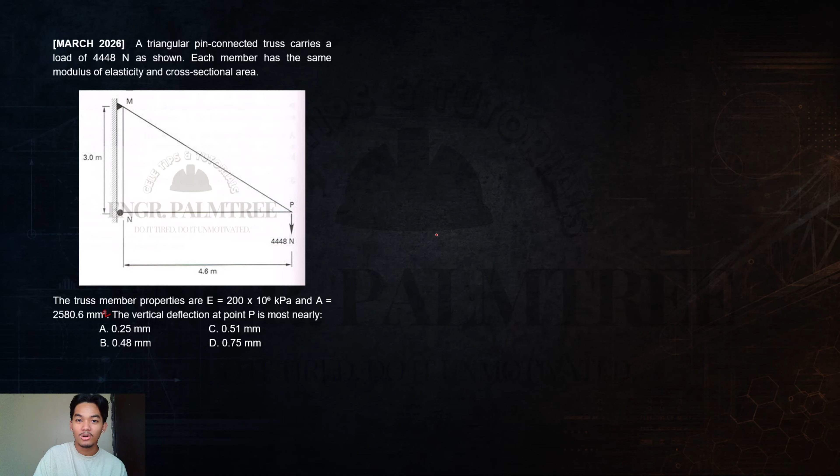So actually, nung lumabas to sa boards guys, merong binigay si Sir Dakay na virtual work equation. Dito sa actual reference niya, wala. Pero yung pag-solve nito is also virtual work, so it's the same lang.

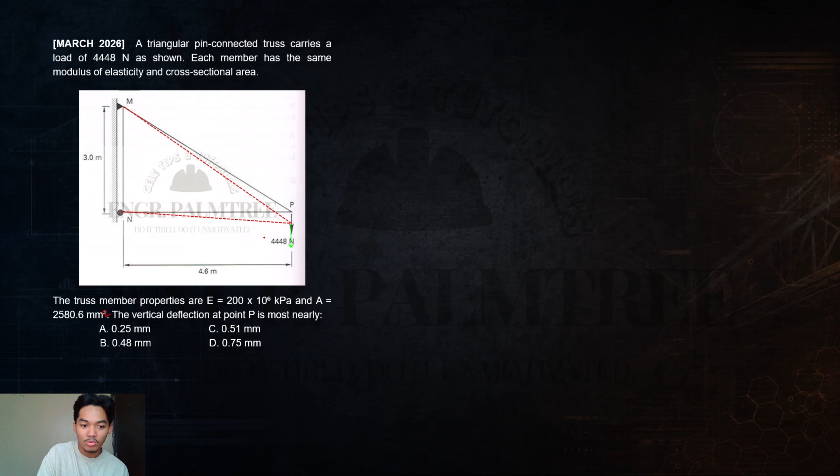So remember, pag meron tayong loading, magde-deflect yung body natin. Dito guys, as you can see, magde-deflect yan downwards. So gusto natin kunin is vertical deflection daw at point P. So ito yan guys, ito yung gusto natin kunin, vertical deflection dyan.

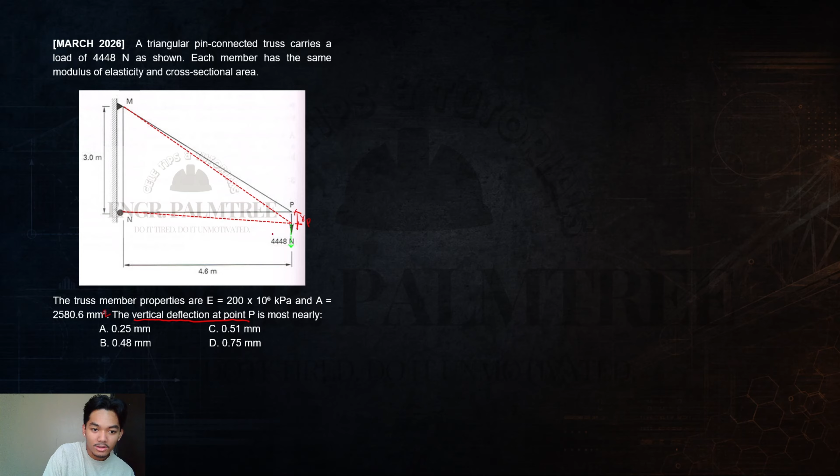So by using virtual work, remember, yung virtual work equation natin is basically just Sulae, summation of S-u-L-a-E. Yung S, yan yung real body natin. Yung U, yan yung virtual body natin.

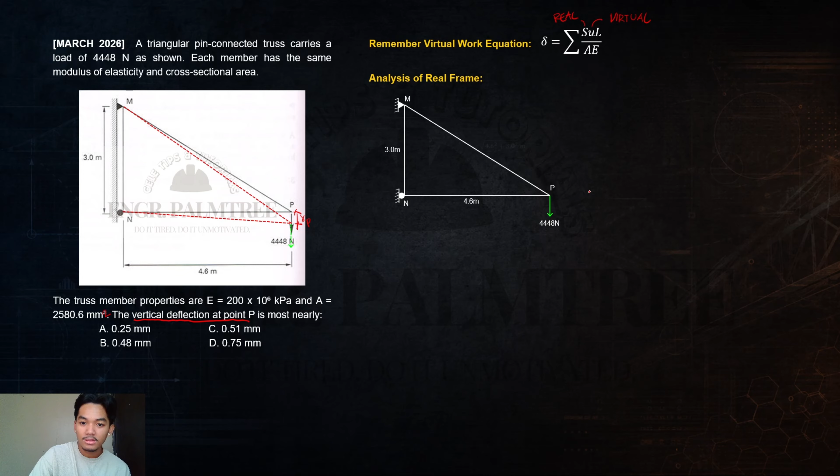So first, i-analyze muna natin yung real body natin. So ito yan guys. You can see, 3 meters daw dito, 4.6 meters dito, tapos meron tayong point load. At dahil 4.6 to, 3 to, at right triangle lang to, di ba? Right triangle lang yan, so pwede natin makuha itong length na to.

Using Pythagorean theorem, yung total length niyan is 4.6 squared plus 3 squared. Magagamit natin yan actually dahil dito, kailangan natin ng length. Kasi yung kukunin natin sa analysis ng real tsaka analysis ng virtual is yung force per member. Force per member. So kunin natin yung force ng MP, ng NP, tsaka yung MN.

Okay, so let's consider muna itong point P. Again guys, pag maka-encounter ka ng frame or ng truss, there's two methods to attack it: method of joints and method of sections. Pero dito guys, kahit pa mag-method of section ka dyan, or mag-method of joint ka dyan, it's the same free body diagram. So considering point P, ito yung force natin, ito yung external force natin. At yung dalawang forces natin na meron, na member is itong NP tsaka itong MP.

So gusto ko guys, malaman nyo paano ba mag-assume ng tama na direction ng force. As you can see guys, downward kasi itong P natin. Then yung dalawang forces na nakakonect sa kanya, yung isa purely horizontal, yung isa naman is slanted. So merong vertical tsaka horizontal component.

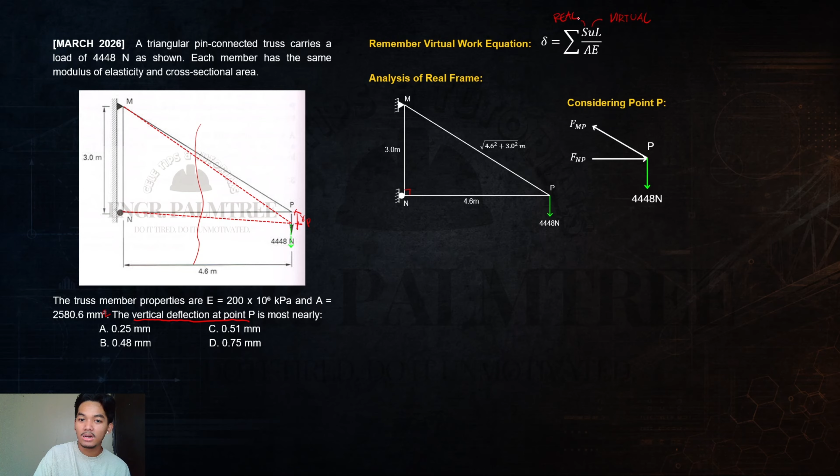So ganyan yung tamang pag-a-assume ng direction ng mga arrowheads natin, when it comes to forces. Pero actually guys, in terms of virtual work, mas madali talaga if gagawin nyo lang tension lahat yung members. Bakit? Kasi guys, yung compression, pag lagay natin dito sa working equation natin na Sulae, yung compression magiging negative.

So if i-tension natin lahat ng forces guys, pag may maling assumption tayo, magiging negative yan, meaning compression dapat yan. Kaya if i-store natin yan sa calculator, naka-negative na. Pero in this case guys, gusto kong malaman nyo paano mag-assume, kasi magagamit nyo yan pag makaka-encounter na kayo ng trusses na merong flexible cables.

Okay, so alam natin guys, since slanting to, meron yang angle. Para makuha lang yung angle, we just use tan. Tan, di ba, is TOA, SOH CAH TOA. So dito yung angle natin, then ito yung opposite. Kasi dito yung right angle, tsaka yung angle na of consideration natin, so ito yung adjacent. So 3 yung opposite, ito yung adjacent, 3 over 4.6. Then we try, pag-calculate natin is tan negative 1 times 3 over 4.6 lang. Then makukuha nating value is 33.11 degrees.

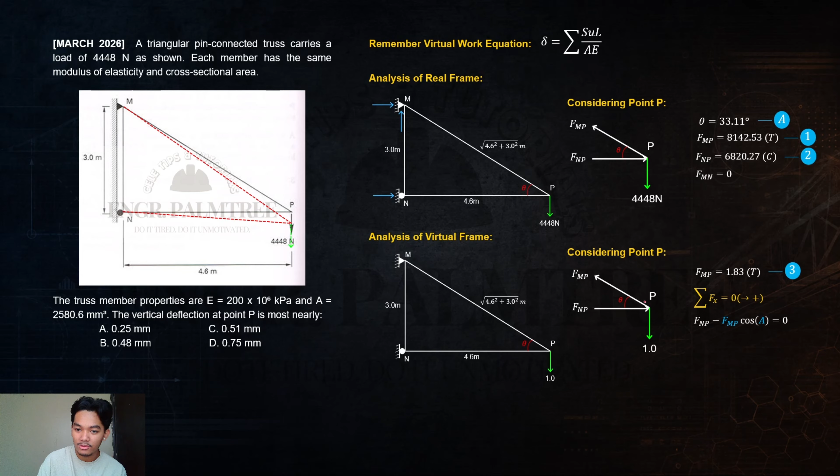And again, if we look at the reactions, it's the same geometry, guys. It's the same geometry. So we know, with the virtual frame, FMN is still 0. Okay?

So let's input all of this into the table for SUL/AE, guys. The member we're considering is only MP and NP, because MN we know is 0 for both frames, from real frame to virtual frame, it's 0. So the S values, guys, those are our real forces. FMP, here it is.

8142.53. Then our NP, again, that's compression, so 6820.27. And if we stored it, guys, when you input into the calculator, make it negative 2, negative 2, since 2 was stored.

And our U values, those are our virtual frame forces, 1.83 for MP, negative 1.53 for NP. Our length for MP, here it is, right? 4.6 squared plus 3.0 squared.

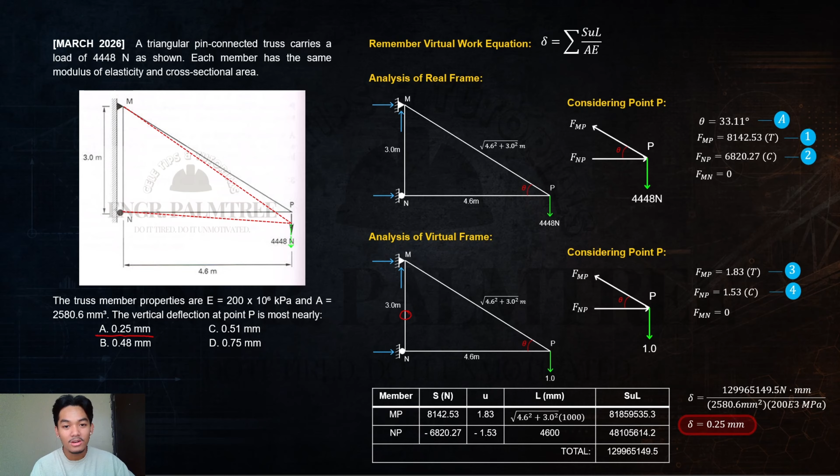But actually, guys, when this came out in the board exam, this wasn't my solution, because I have a solution when it comes to frames - single-loaded frame systems where the forces are concurrent at the point of deflection. So let's discuss it.

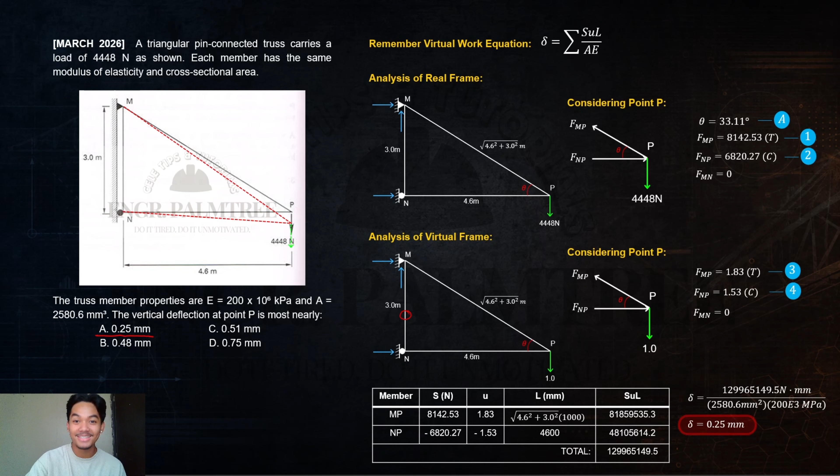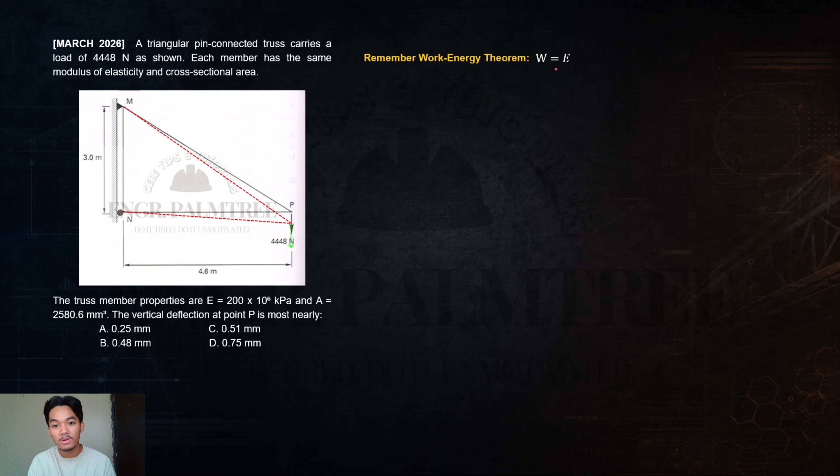Remember, guys, our work-energy theorem, which is work equals energy. Actually in physics, as written here, it's summation of work plus change in potential energy equals change in kinetic energy. But basically, this is the principle. And this W, that's work, right? This E is energy. So first, let's discuss the work done by external force.

So let's say, guys, we have a pole fixed at the top. We have a pole, we'll gradually apply a point load. Why gradually, guys? Actually, in statics of rigid bodies, although not stated in the problem, forces are applied gradually. It's not instant, like 4448 Newton instantly, because if it's instant, what happens is our frame, our beam, our truss, will vibrate.

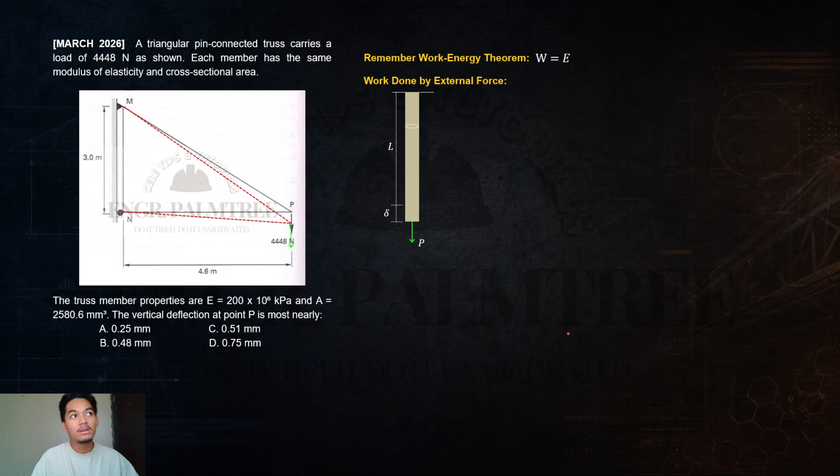Then it will have acceleration, so it becomes dynamics, not static equilibrium anymore. So by principle, in statics of rigid bodies, P is gradually applied. So if we gradually apply the P, there will be deflection. And actually, guys, we can calculate the work done by using the relationship of our force and deflection, and their relationship, guys, is simply linear.

This is the linear elasticity that statics or SMAT talks about. It's just linear, guys, the P and the deflection. Of course, if we increase the P, the deflection will also increase. And the work done, guys, is basically just the area of this triangle, just the area of that. That's our work done, guys. So we know, work is 1/2 times deflection times P, because this is a triangle, right? This is deflection, that is P. That's our work done, guys.

So next is the energy. Since we have work done, guys, it doesn't just disappear, it has to go somewhere, it has to go somewhere. Right, since it's gradually applied, gradually applied, so there's no acceleration. Basically, the velocity of the movement of the member, as it deflects, is constant, constant velocity, acceleration is 0. So since there's no acceleration, guys, since this is static equilibrium, there's also no kinetic energy, kinetic energy is 0. So where does this work go?

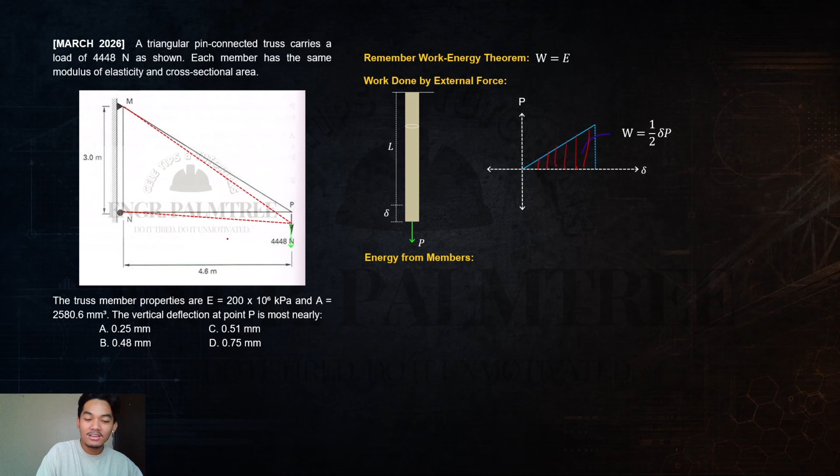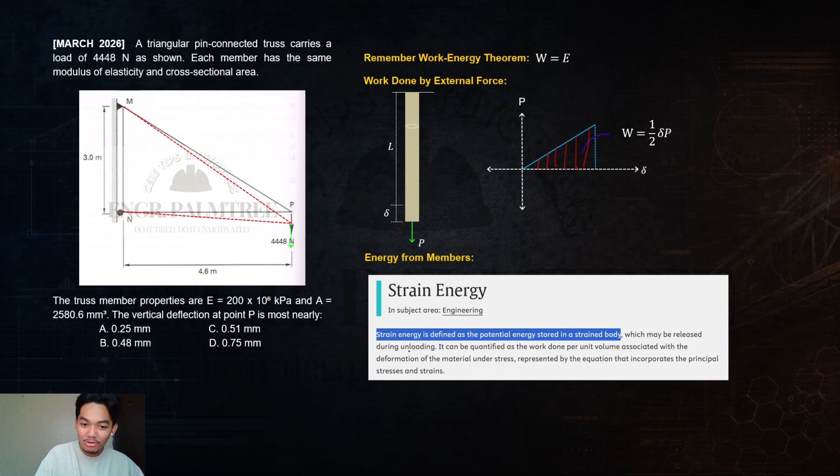Guys, it goes to the potential energy of our members. What is the potential energy of our members? Isn't that the strain energy? As you can see from the definition, guys, strain energy is defined as the potential energy stored in a strained body. What is the strained body here? Isn't that our members? So what is the strain energy formula? Isn't it just this?

U equals 1/2 times deflection times P. Actually, same lang siya ng work, and same lang yung strain energy natin. So knowing that, meron na tayong working equation, guys. Itong W, guys, that's work done due to external forces. Itong U, yan yung strain energy ng members natin. Kaya summation siya. So kung i-substitute natin yung work tsaka yung strain energy, ito yung working equation natin: 1/2 times deflection times external force equals summation ng 1/2 times deflection ng internal force.

Okay, so let's talk about the limitations of this method, guys. Actually, guys, this principle, dito galing yung virtual work and Castigliano natin. Pero hindi to tinuturo kasi limited lang to. But actually, sa boards, guys, since hindi naman nagbibigay ng super complex na mga loadings, nagagamit ko talaga to, guys.

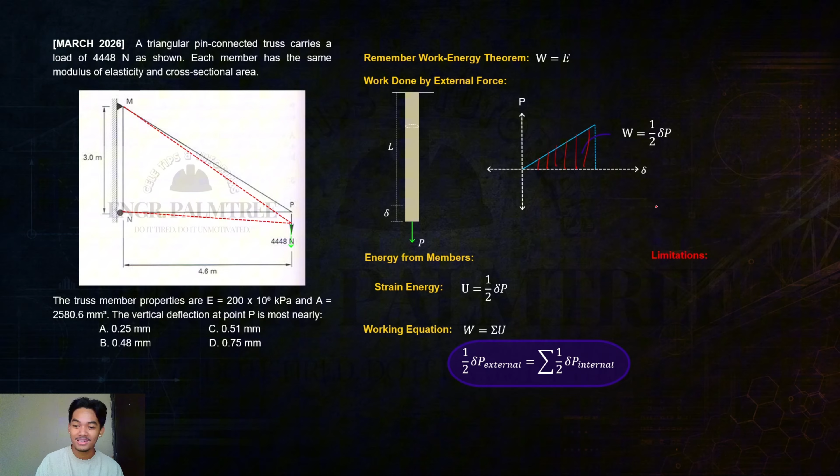So yung limitations, guys: single load systems only lang to. Dapat isa lang yung external loading. Tsaka yung deflection must be at point of concurrency of the external force and the members.

So as you can see nito, guys, yung P andyan, diba, dyan yung kukunin natin ng vertical deflection. And as you can see, yung external force natin tsaka yung members concurrent dyan at P. So tama tong number 2.

And yung number 3, guys, yung deflection should be the same direction as the external force. Again, downward, diba yung external force natin? Yung vertical deflection na gusto natin kunin is also downward, so it's the same direction. Pwede yan gamitin, guys. Remember this limitation, baka mamali kayo: dapat single load system, dapat yung deflection is at point of concurrency ng external forces and yung members natin, and dapat yung deflection is the same direction as the external force.

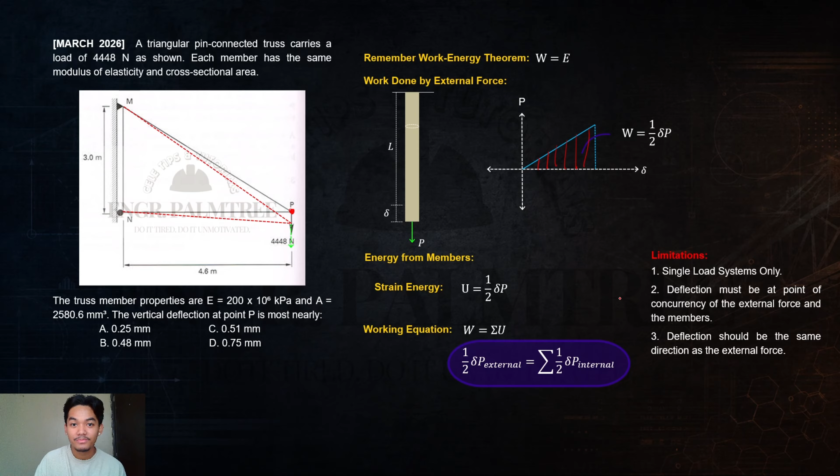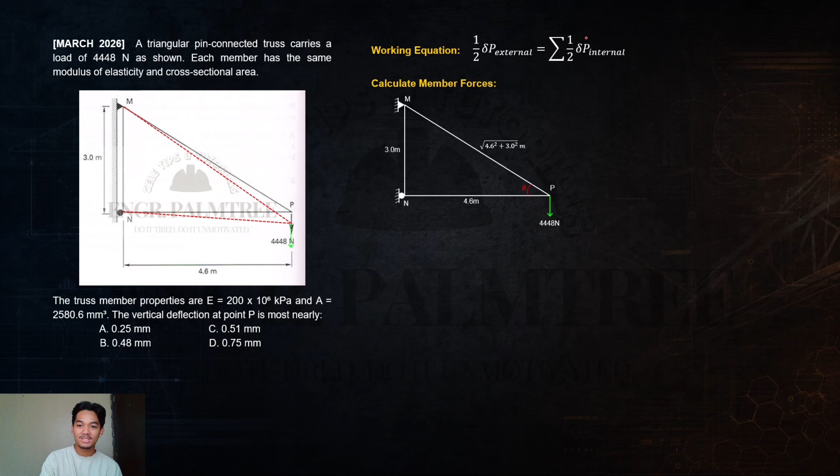So let's try with this problem. Una, kailangan pa rin natin i-calculate yung member forces kasi kailangan natin dito for our working equation. So again, it's the same process, guys. Let's consider point P. Alam na natin itong angle natin, so summation at y tayo. Yung makukuha natin again is 8142.53, yan yung tension. Gusto ko i-store nyo yan sa 1.

So next, mag-summation tayo at x. Dito, positive yung FNP, negative yung FMP, kasi right yung positive natin. Then cos A, kasi gusto natin kunin yung horizontal component. And yung makukuha natin is 6820.27, that is compression, and I want you to store that to 2.

So meron na tayong forces. At yung FMN natin, ito, 0 yan. But actually, di natin yan kailangan kasi hindi yan dito. Wala yan dito, 0 din yan, wala yan dito.

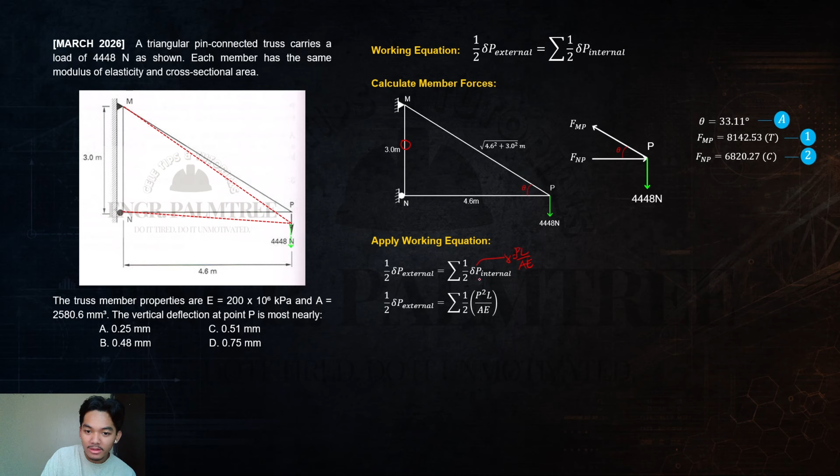So let's apply the working equation, guys. Diba ito yung working equation natin. Pero paano ba to, guys? Wala kasing given na deflection. Alam natin, diba, itong deflection na to, this is basically just PL/AE. Diba PL/AE ang deflection natin from SMAT? So we can substitute yung PL/AE dito. And since meron na tayong P, so PL/AE times P magiging P squared L over AE. Kaya ito na yung final working equation natin.

So let's substitute. Una, gusto ko munang kunin nyo yung AE, store nyo sa E, kasi yung angle natin nasa A. Store nyo yan sa E, guys, kasi as said here, each member has the same modulus of elasticity and cross-sectional area. So constant yan, guys. I want you to store that to E.

Next, let's substitute na. Tingnan muna natin dito, guys, ito yung work done by the external force: 1/2 times deflection, yan yung gusto natin kunin. Itong 4448, yan yung external force, diba? Equals, as you can see nito, guys, may constant yan, itong 1/2 tsaka itong AE. Kaya nilabas ko na, guys, 1/2 E.

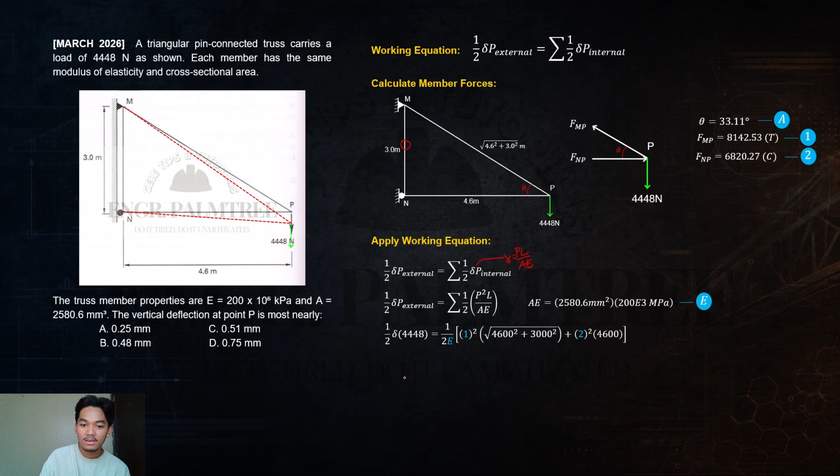Ito, yung nakastore na AE, 1/2 E times itong 1, ito yan, 8142.53, times yung length niya, diba, square, P squared L? So 1 squared times 4,600 squared plus 3,000 squared para makuha natin itong length na to in mm, plus 2, which is ito, 6820.27 squared times 4,600. So kung i-calculate natin yan, guys, if we shift solve for x, itong deflection na to, gawin natin yung x. Shift. So for x, guys, yung makukuha nating value is 0.26 mm.

So actually, meron siyang discrepancy, yan yung problema dito sa problem. Meron siyang discrepancy, pero ang liit lang ng discrepancy na yan, guys, 0.01 mm. So tama pa rin na ito pala yung answer natin.